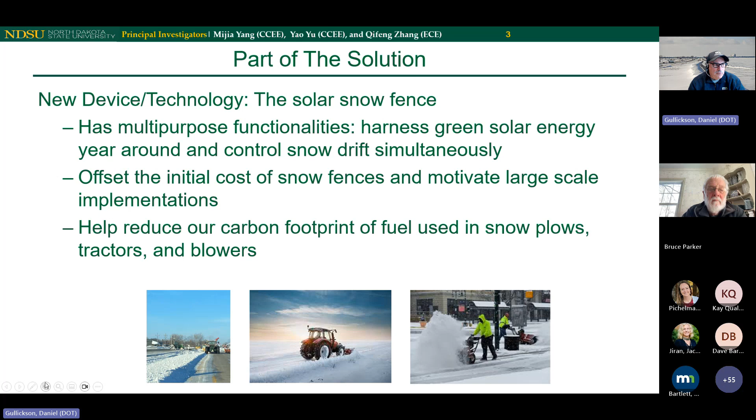Now, as we look at our solar snow fences, we want to make sure that they also function as a snow fence. So as part of the research project, the North Dakota State folks are going out there and measuring the drift profile. Here we have our solar snow fence. It has a porosity of about 38%. So it's got a little more density than our traditional snow fence, which has 50% porosity. So that does cause the snowdrift profile to be a little bit different. But at the end of the day, we want to have an understanding of that so that we can properly site these things in the field.

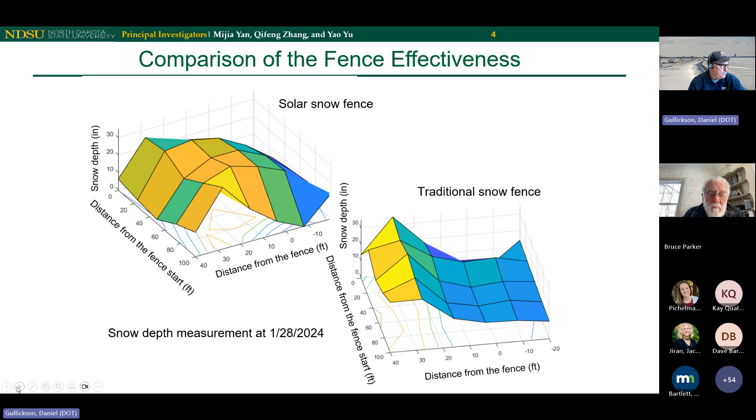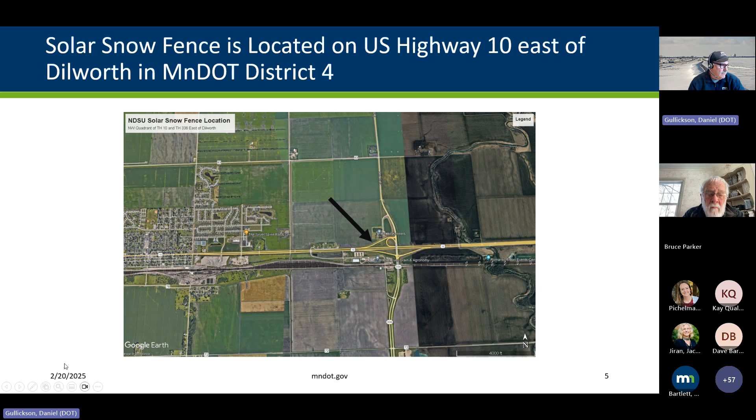To give you a feel for where the snow fence is located, it's located in MnDOT District 4 off US Highway 10. And the prevailing wind direction is shown with the black arrow there; it's coming across a mile plus across the farm fields. So we've got a really good test section here for assessing its effectiveness.

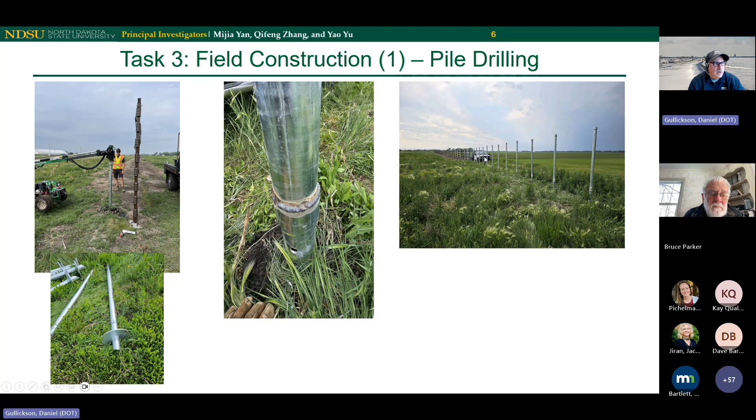The snow fence installation here is using a different type of method of installation. They're using helical foundations, which basically get screwed into the ground. And then when they hit resistance, they know they can stop, that they have enough resistance there to hold the structure. But they can keep adding these extensions here until they hit that point of resistance. So it's an innovative way of installing it. These foundations are in the ground about 6 feet, and this is the post that goes into the sleeve, and then you can see the posts that are located here before they start to assemble the solar panels.

It's an 8-foot tall system, and the solar panels have a metal backing to give them support. They were finding that they weren't going to have enough strength in the solar panel if they did not put the backing on there. And so they were able to test that in the lab at North Dakota State. And then we've had it out in the field now for 2 years to assess its effectiveness in terms of holding up to the wind loads. And it's working really, really quite well for us.

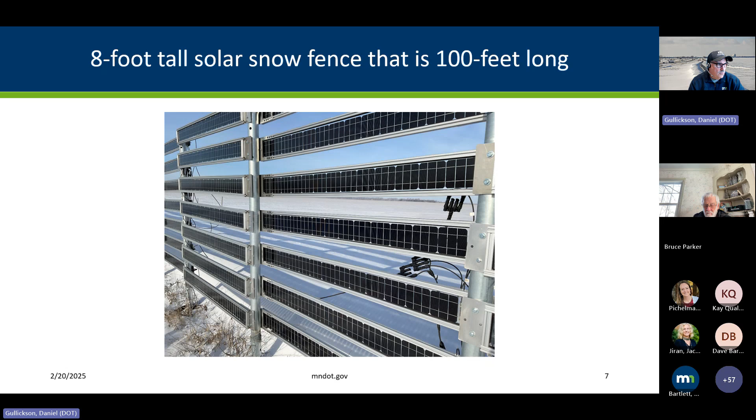So what is the energy production of this solar snow fence? We have a 100-foot section that was constructed, and they are collecting monthly and daily data in terms of its energy production. And so on average, we're producing 11 kilowatt hours per day with this 100-foot section of snow fence.

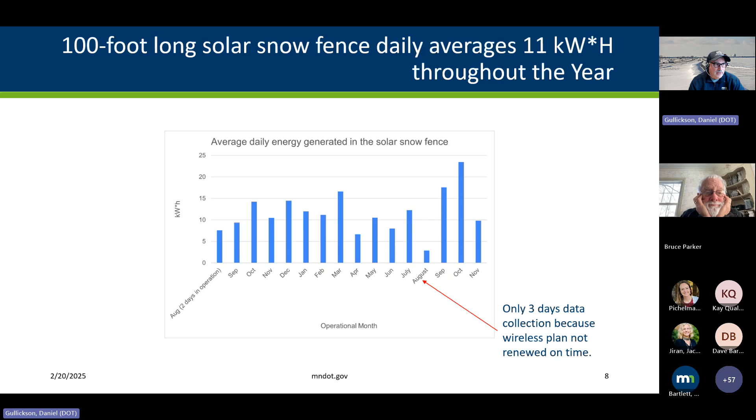As we look at our year, the colder months like November, December, January, February, we're all pretty much right above that 10 kilowatt hours per day, and that's with the lower sun angle. So that's encouraging. You'll see an outlier here. Their cell phone plan wasn't renewed on time, so we're missing data for the month of August. So that's why we see the month of August at such a low level there. But that's the beauty of research: you can have these little hiccups and it's not an end all, it's just part of the learning curve.

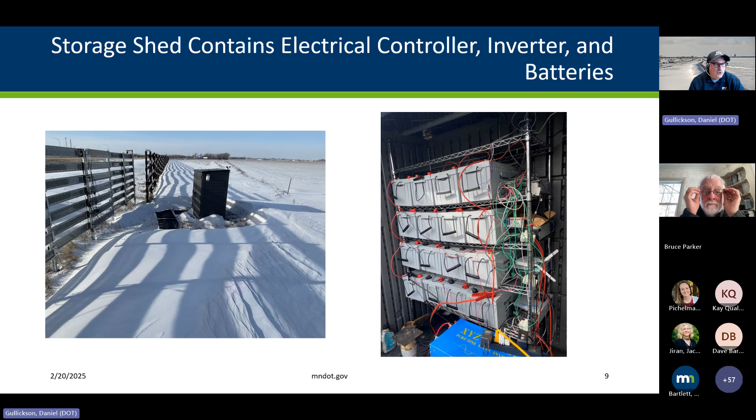So the way the system works, the system is not connected into the grid at all. Everything that's being produced by the snow fence is being used on site. The energy that's being collected is running through these cables and going to the storage cabinet. Inside the storage cabinet, we have our battery system, the inverter, and the controller for managing the system. There's also heated pads around it here. And then they have weather instrumentation, little lighting here, just having opportunities to utilize some of that energy that's being produced since we're not in the grid.

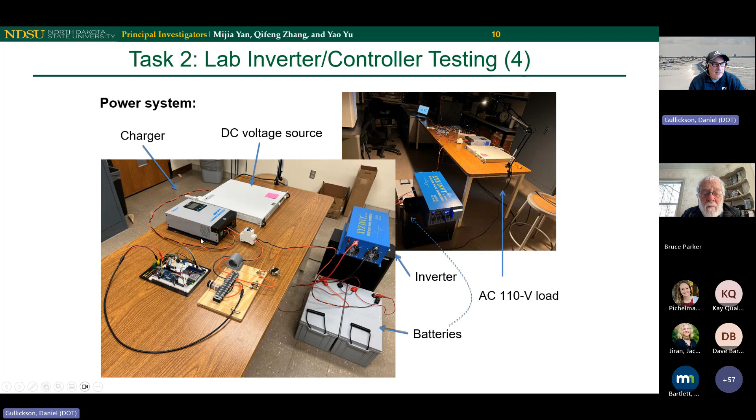So as you look at the solar snow fence, the solar panels are collecting the energy from the sun in a direct current. So then it needs to go through an inverter so it can be put into an alternating current that can be used by your appliances out there or to be connected up to the grid. So they had to come up with the electronics here to be able to convert the power. And a lot of innovation here was done by North Dakota State.

It uses a solid state transformer to read the sensor outputs from the main module to prevent unstable operation. The entire system can be disabled in the event of an emergency. Modules are isolated, so a problem with one does not affect the entire chain. And due to the high frequency isolation transformer design inside each inverter module, only low voltage DC current of 30 to 50 volts and low voltage alternating current of 36 volts are generated within each module.

This is really an important piece in order to prevent accidental electrocution. Even if the solar system is hit, someone goes up to it and hits it by accident or in the form of a crash, we don't want to see people get electrocuted. And so by managing the system here, we can make it safer and have it in areas where people could be around.

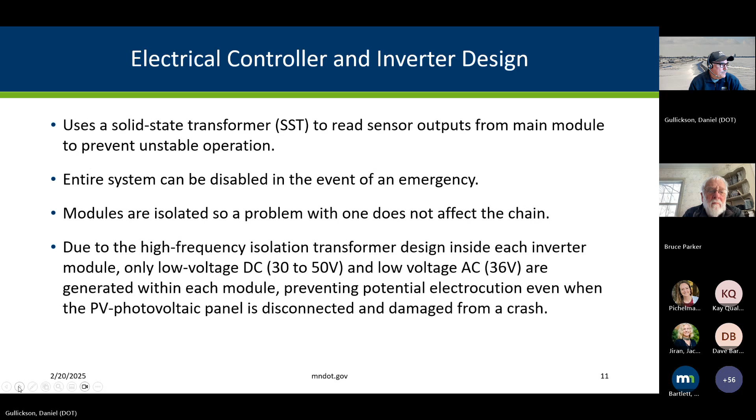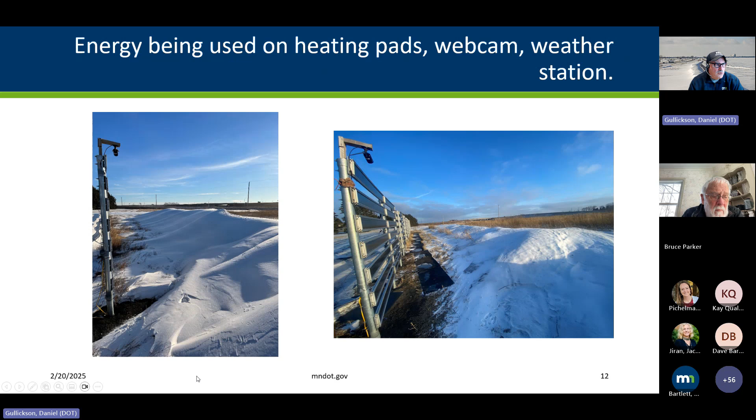So as I mentioned, the energy is being used in these heating pads. After the snowfall here, you can see the heating pads are covered, and then later in the day, the snow is melted. This is kind of an active system in the sense that it's not only just a snow fence, but it's also actively melting the snow around the snow fence throughout the winter. And that can have some benefits in reducing our offset from the road with these snow fences because they're continually melting snow. We also have a webcam out there. So we're trying to find opportunities to utilize that power on site that's being generated.

So one of the things that the research team from North Dakota State looks at is the economics of this. As part of their benefit cost analysis, they found that a power purchase agreement model is a mechanism that would allow MnDOT to accrue the benefits of the solar power without owning the system. In a power purchase agreement, a developer procures, builds, operates, and maintains the system, while MnDOT may buy the power from the developer at a negotiated rate.

And thus the developer builds the system, MnDOT would benefit from it and also be purchasing it at a negotiated rate. And there's various solar developers out there, and there's probably more that'll be coming on board. So with the power purchase agreement, the benefits to MnDOT are minimal upfront capital costs, potentially lower energy costs for our system, and no system upkeep because it's being done by others.

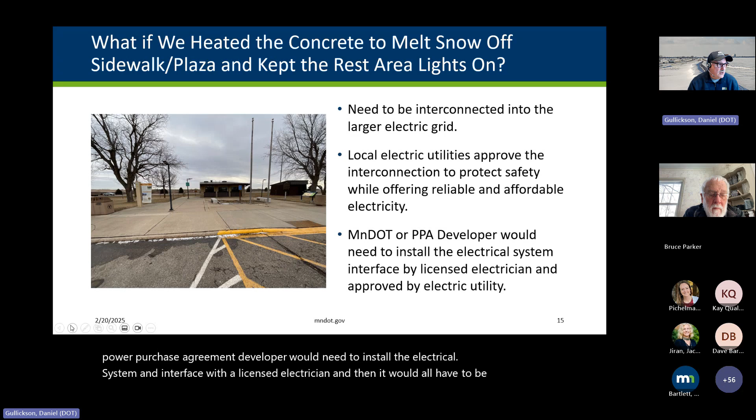So looking at that scenario there, we've got 6,000 square feet that would need to be melted in terms of sidewalk and plaza to get up to the rest area building from the parking lot. North Dakota State looked at, well, what does it take to melt 2 inches of snow? It takes about 14.4 BTUs per square foot to be able to melt that snow. And so as we look at the number of BTUs needed to melt 6,000 square feet of sidewalk and plaza, that's over 100,000 BTUs. 1 kilowatt hour is the equivalent of 3,412 BTUs.

And so you look at the number of BTUs divided by that 3,412, it converts it into, we need to be having the ability to produce 29.81 kilowatt hours per day. Now the concrete is probably only going to be 80% efficient in terms of transferring that energy, and so we need to factor that in. So with that, we need to bump that up to about 37.26 kilowatt hours per day. We know that the 100 lineal foot of snow fence is 11.7 kilowatt hours. So taking that 37.26 divided by the 11.7, we need about 318 feet of snow fence to be able to keep that sidewalk plaza melted.

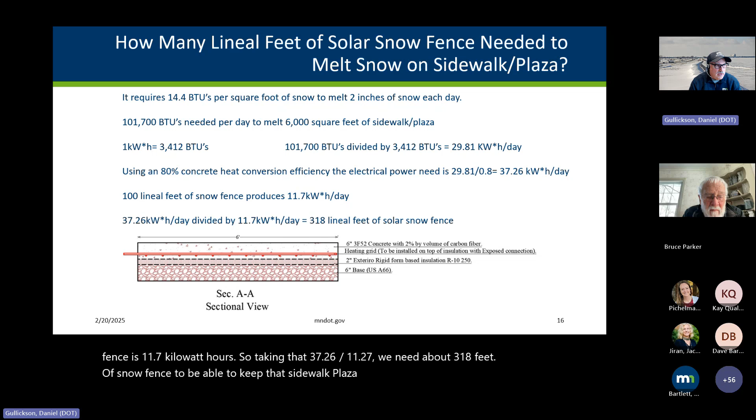And some of the other research that we're seeing, like from other universities, like Iowa State, looking at having heated pavements, having the 6-inch base, having 2 inches of styrofoam insulation, but near that base, putting in your concrete that has a carbon fiber 2% by volume content helps to move that energy from the heating grid that would be embedded into that concrete. And so this would be just a hypothetical scenario, but could have some real life applications in terms of just making it safer to get into a rest area building.

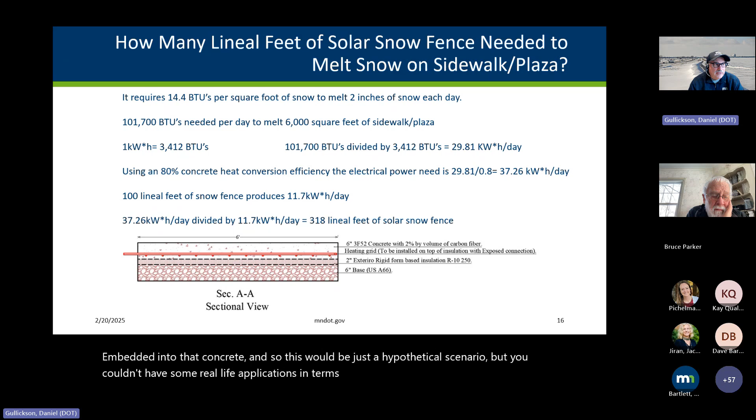What if we were to keep the lights on? Well, reaching out to the utility company, they looked at our energy use in 2023 using 33,480 kilowatt hours of energy, which figures out to be about 91 kilowatt hours per day. In 2024, the numbers are fairly similar. The peak demand was 10.2 kilowatt hours. And so looking at the ability to keep the lights on, we would need 780 feet of snow fence to be able to keep the lights on in that facility. And so if we want to keep the lights on and keep the snow melted on the sidewalk and the plaza, we would need about 1,100 feet of snow fence to be able to meet that demand at that rest area.

So summary and conclusion, the solar snow fencing system has been designed, built, and installed in the field. We haven't implemented something like I described here, like at that rest area scenario, but we have developed a 100-foot section to test to see what it can produce. And the performance has been monitored over the past 12 months. Our average energy generated averages between 10 to 30 kilowatt hours, depending upon the solar intensity of the day. Electricity generated has been used by 16 melting pads, which makes this system an active system that it's not only a snow fence, but it's also actively melting snow throughout the winter.

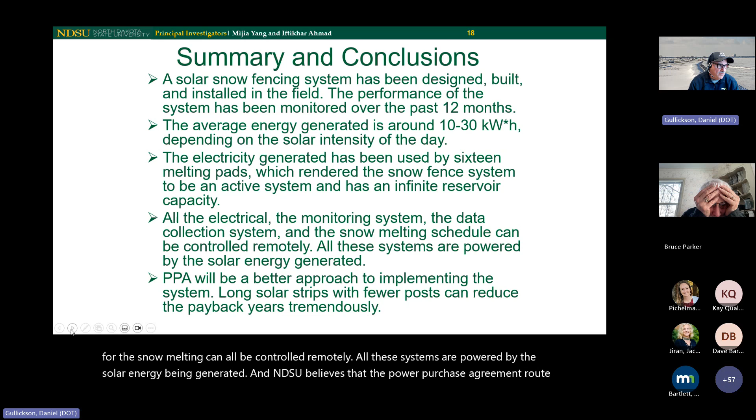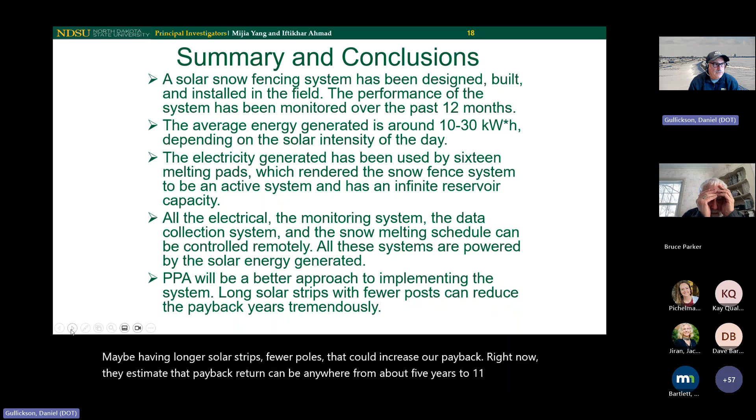And all the electrical, the monitoring system, the data for the snow melting can all be controlled remotely. All these systems are powered by the solar energy being generated. And NDSU believes that the power purchase agreement route is the best approach for implementing the system, and that there still can be some efficiencies gained in terms of maybe having longer solar strips, fewer posts that could increase our payback. Right now, they estimate that payback return can be anywhere from about 5 years to 11 years with this type of a system that they've developed, but there could be further efficiencies gained with further refinement.

I've also reached out to the Department of Administration, Office of Enterprise Sustainability, to get their thoughts on the solar snow fence. And their thoughts are that the amount of solar energy being produced by this is less than 2 to 10 megawatts, and may not garner much interest from solar developers. This 1,100 feet that I mentioned that we were doing this hypothetical, that would have produced about 0.13 megawatts.

So it may not attract much interest from these larger developers. The solar snow fence is a specialized custom build application that could scare away some developers. NDSU had to fabricate those solar panels so they're 6 inches wide, getting them to fit on the rails. That's not your typical solar panel. They're usually much larger. And so there might be some challenges associated with that.

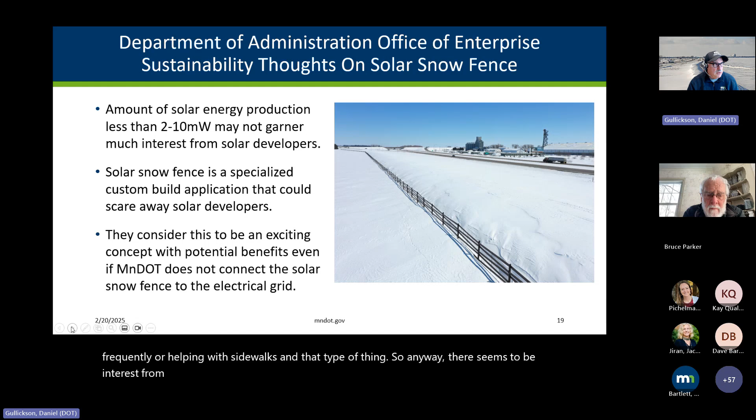But all in all, they consider this to be an exciting concept with potential benefits, even if MnDOT does not connect the solar snow fence into the grid. Like, for example, if we were to maybe just heat the concrete, heat the surface so that maybe bridge decks aren't frosted up as frequently, or helping with sidewalks and that type of thing. So anyway, there seems to be interest from the Office of Sustainability within Department of Admin in this concept. And with that, I thank you.

Thanks, Dan. Appreciate that. It's been a really fun implementation project to follow. So we really appreciate your time. Next up is Elliot McFadden. He's going to share about impacts of shared mobility on infrastructure usage, greenhouse gas emissions, and accessibility.

Yes, thank you for having me. Let me make sure I'm on the right window. So I'm going to be presenting as the technical lead on our project, impacts of shared mobility on infrastructure usage, greenhouse gas emissions, and accessibility. It's a very pithy name that just rolls off the tongue.

I wanted to start just by defining what is shared mobility. I have previously been the manager of our statewide shared mobility program at MnDOT, but it's maybe a technical term not everyone's familiar with. So when we talk about shared mobility, it's essentially any transportation service that is shared among users. So users may use the service at the same time or independently of one another.

So examples of services that are used at the same time are public transit, taxi and ride hail services, and carpooling and van pooling. And services that may be used independently are things like car share, which is akin to short-term car rental within neighborhoods, bike sharing, scooter sharing, and some types of delivery service.

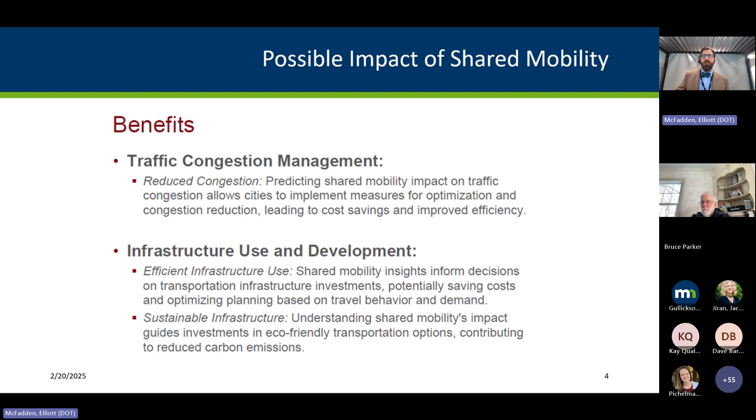And bike sharing programs help get people onto green transportation, but also have operational needs to balance vehicles, move them around, that may offset the benefits as well. So some of the benefits we think about with shared mobility, as I mentioned, traffic congestion. So if we're moving people out of private vehicles, we may be looking at ways to reduce traffic congestion. It also can reduce impacts on infrastructure development, especially if you move to bikes and transit. There may be less need for additional road capacity and less wear and tear.

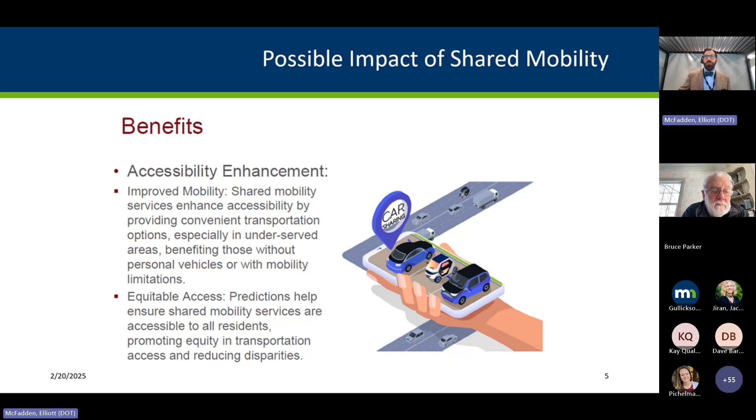It's also an accessibility issue. So we have many people within our communities that don't have access to private vehicles, and shared mobility is another layer on top of public transit. Private shared mobility providers can add more access, more options for folks to be able to go to appointments, be able to go to work, and just generally quality of life. Be able to access everything that someone with a personal car can.

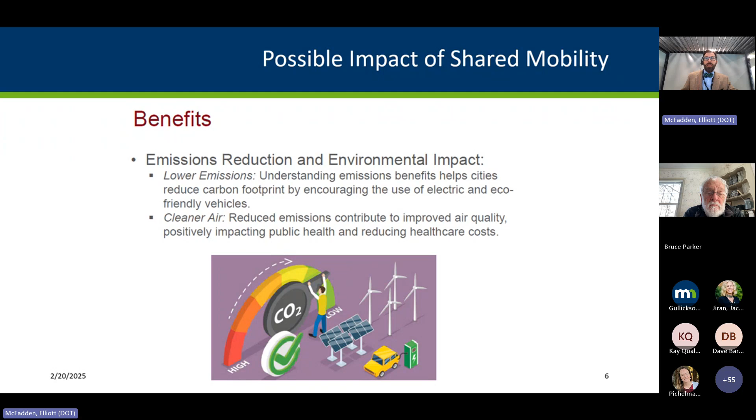It also has tremendous potential to help us meet our greenhouse gas emission goals. So moving people to lower carbon footprint options. Also, because of the heavy use of fleet cars, it makes it easier to introduce electric vehicles into fleets at a higher rate than you would see in the private marketplace. There are some costs though as well. So we may need to look at how we design infrastructure to accommodate things like pickup and drop off zones and spaces for bike share, bikes and scooters, things like dedicated lanes, additional sidewalks, and additional accessibility.

So the project that we've been working on has been trying to address the problem of how shared mobility options are changing travel behaviors. How are they impacting vehicle miles traveled, infrastructure use, and the environment? And the challenge that we have is our existing models don't really account for these new shared mobility options. So we have a harder time predicting the impact as these systems grow, or policies that may be implemented to grow or reduce the number of options.

And so the solution is to create a new model that looks at how different fleet sizes and different policies may impact these different goals for both MnDOT and also for local partners. And our lead investigator on this is Michael Levin, a PhD at the University of Minnesota, who works in the Department of Civil, Environmental, and Geo-Engineering.

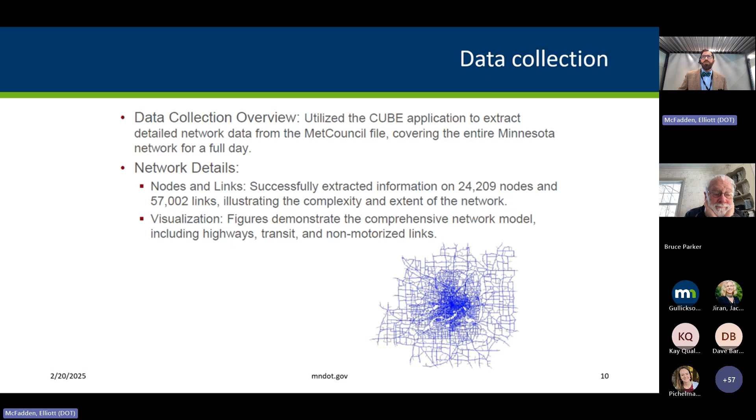So just an example of some of the data collection that's already been happening, using our different sources of traffic information to pull together a really comprehensive look at traffic patterns within our road network. Also looking at accessing transit data and layering that on top of it, as well as data from shared mobility providers, so that we're really getting a comprehensive look at the kinds of trips and vehicles that are being used and where they're being used across the infrastructure to help build a realistic model.

The modeling approach itself, as I mentioned, brings together all of these different data sources. It's looking at how people choose to make a trip, by what mode. It assumes that users are going to try to take the travel option that provides the least amount of travel time as its primary way of looking at mode choice. And it aims to be a comprehensive model of predicting travel behavior based on different levels of fleet availability and policies that you may implement that may impact those as well.

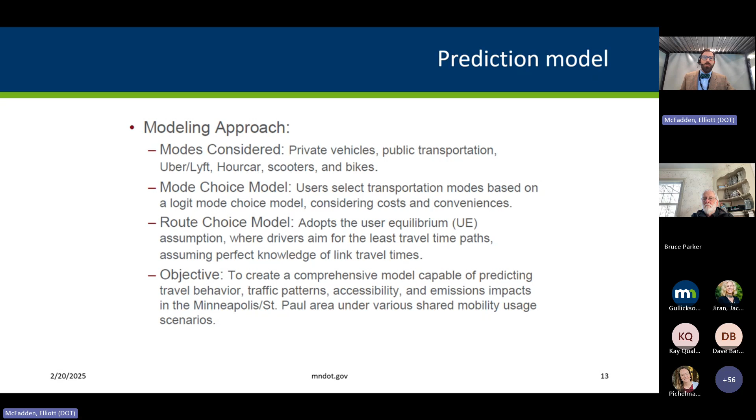I'm going to share a sample scenario that's been run as part of the model as it's being developed right now. So in this case, we're looking at the city of Minneapolis, and we have 4 scenarios. We have a base scenario, which is the current conditions in Minneapolis. We have a scenario where we've implemented policies that affect the price of using a TNC, which is a transportation network company or ride-hail service, so a service like Uber or Lyft. We've implemented a policy that makes that very high cost, so it's discouraging users from using the TNCs.

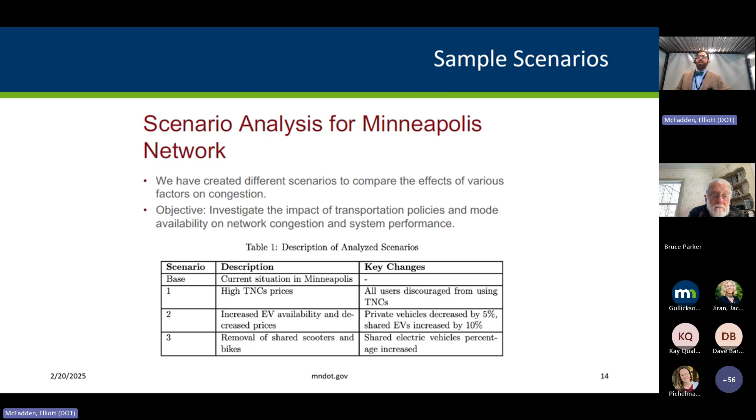The second scenario is we're looking at increasing the availability of shared electric vehicles. So if you're familiar with Hourcar and the EV program, this would be what that would be. Looking at some of the impacts of that in the decrease of private vehicle use and the increase in shared electric vehicle use. And then the final is policy: what if you removed permitting for shared scooters and bikes, and what impact that would have. So I'm just showing a couple of, on the initial modeling, the impact across this base scenario and 3 alternative scenarios.

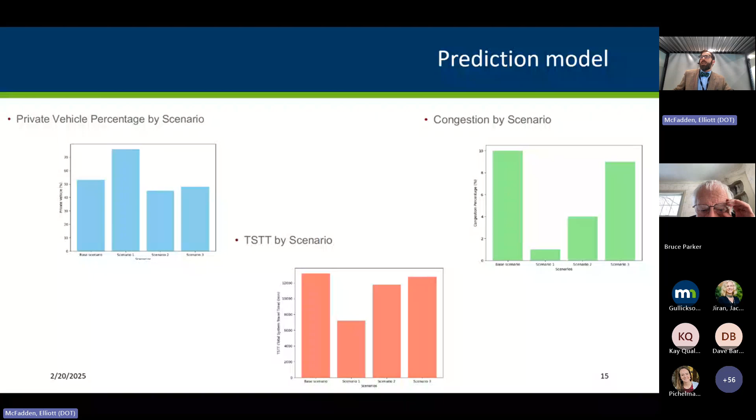And our project end goals are really to make this a tool that better informs decision makers. So both at the state level and more specifically, a lot of policy around shared mobility is developed at the local level. Having a data-driven approach to understand what the impact of different policies would be as you increase or decrease the availability of these services, and then have a better sense of how that fits into the general landscape of overall policy goals for those organizations.

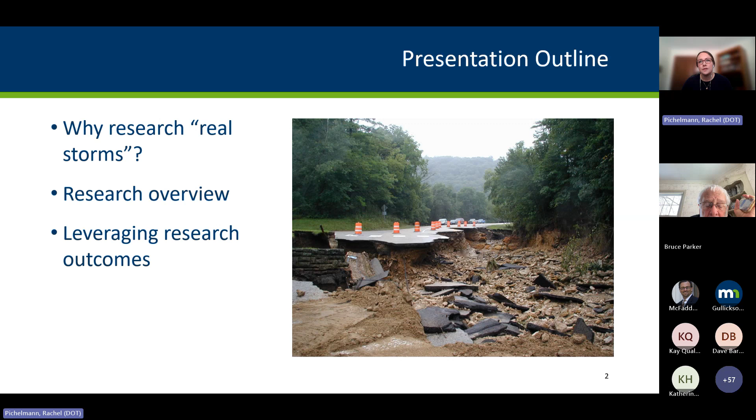So, quick overview of the information I'm going to share. I'll start out by talking about why we are researching real storms and what exactly I mean when I say real storms. And then I'll give an overview of the research itself. And I'll conclude by talking to you about how we plan to leverage the research outcomes. So, to get started, why are we researching real storms? And there's kind of two parts to this answer.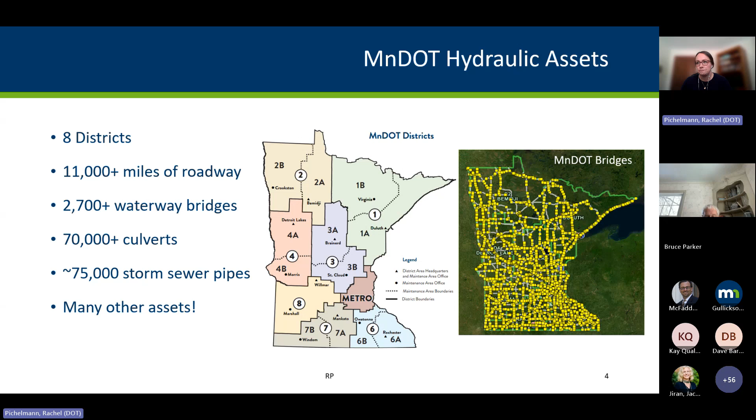So I'm actually going to back up to the previous decade and highlight for you one event that happened in August 2007. So the graph shown here is illustrating how much rain fell during this event. And just call your attention to the blue areas. That's when we get into the 6 inches plus. So it's about a 100-year rainfall event. And in that far southeastern corner of the state, there was actually a record set during this event. And that record still stands for the most precipitation in 24 hours at a National Weather Service observing station. And it was more than 15 inches of rain that fell in 24 hours from this event.

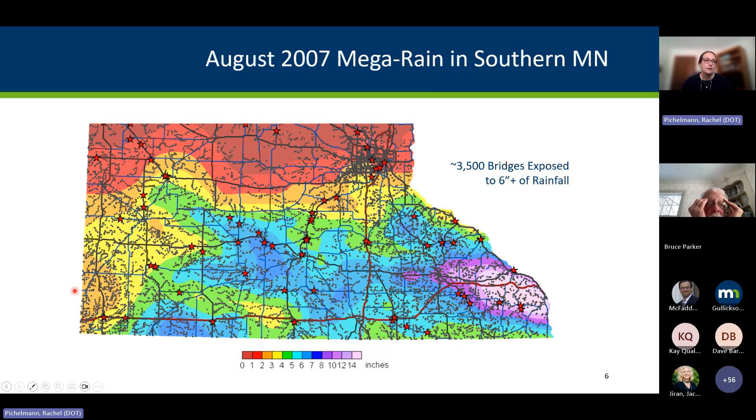It's not surprising then that we had some damage, right? So the photo on the left is from the Money Creek Bridge on Highway 76. During this event, the water in Money Creek really swelled and it ended up washing away the bridge entirely. So of course we've got maintenance forces out there closing the road to keep the travelers safe. And that closure had to continue until that bridge could be replaced.

And then on the right, we see Highway 74 through Whitewater State Park. And again, there's so much water in the river because of that rainfall event that it led to erosion along the roadway embankment and caused the damage that we see here. So once again, we've got to close the road, keep the public safe, and get the repair completed.

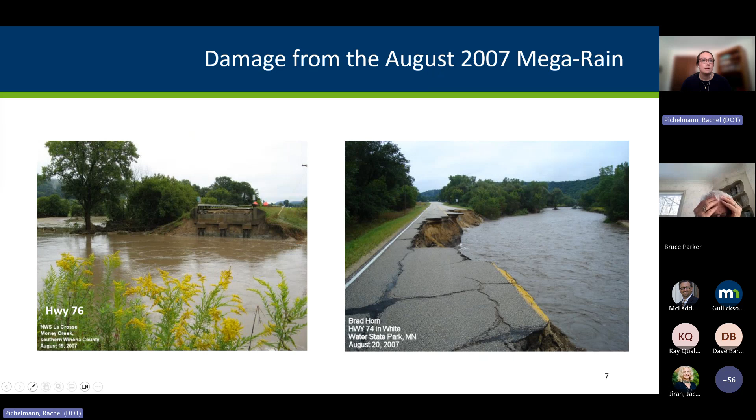And following that event, District 6 put together a really nice map that illustrates really how widespread the highway closures were, and so we've got the purple lines showing the state highway closures. But what you have to keep in mind is that there's also local roads that sustained damage from that event and were closed as well. So we're talking about really significant impacts to transportation following this flood event.

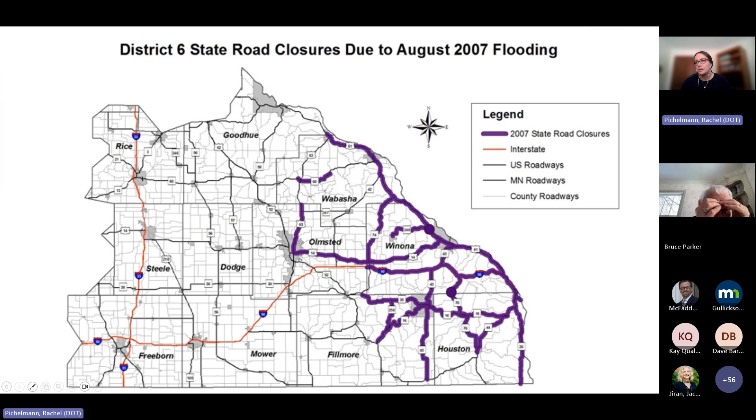Now, that was almost 20 years ago, but we got a reminder just last summer of how impactful flooding events can be. So this is a screenshot from our 511 map taken last summer. This is around the same time we started to learn about the Rapidan Dam getting overtopped. But here we see that there were more than 20 flood-related closures and warnings just in southern Minnesota.

And because of the scale of the map here, you can't even see northeastern Minnesota. But at the same time that we were experiencing these impacts, there were areas in northeastern Minnesota and the Arrowhead region that were also experiencing flooding.

And this is a map that shows the rainfall totals from that event. So in that northeastern corner of the state, we're seeing 5 to 6 inches of rain. Again, that's like a 100-year rainfall event. That's what we would typically size ponds and some bridges to handle. But in southern Minnesota, we got more than 9 inches of rain. And this is over a 9-day period. But that's still on the order of a 500-year event, so far exceeding what we would typically be using in design. All right.

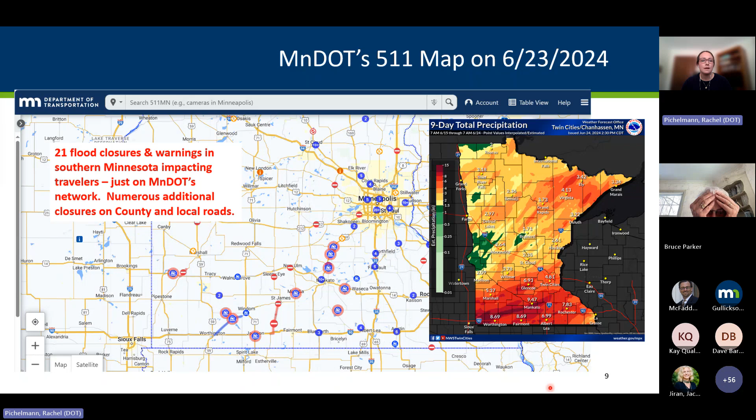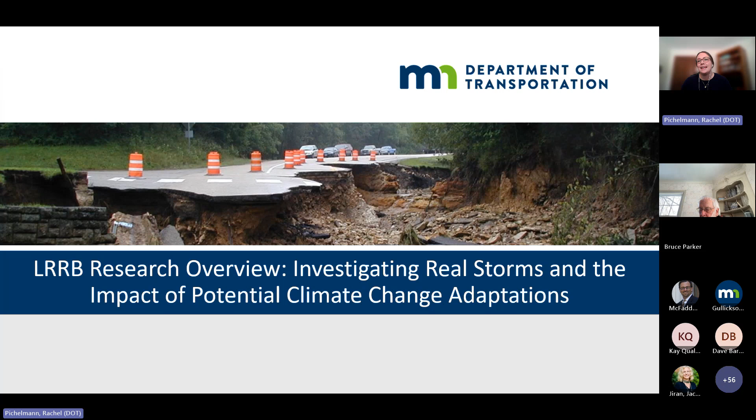So transitioning now, hopefully you have a good understanding of how flooding can affect transportation. So I'm going to talk a bit now about the research project that is underway, the title being Investigating Real Storms and the Impact of Potential Climate Change Adaptations. So one of the tools that our research team at the University of Minnesota is using is a hydrologic and hydraulic model, and I'm going to say H&H model for short. And an H&H model is something that we use every day in water resources to design our water infrastructure, right? Our culverts, bridges, storm sewers, etc.

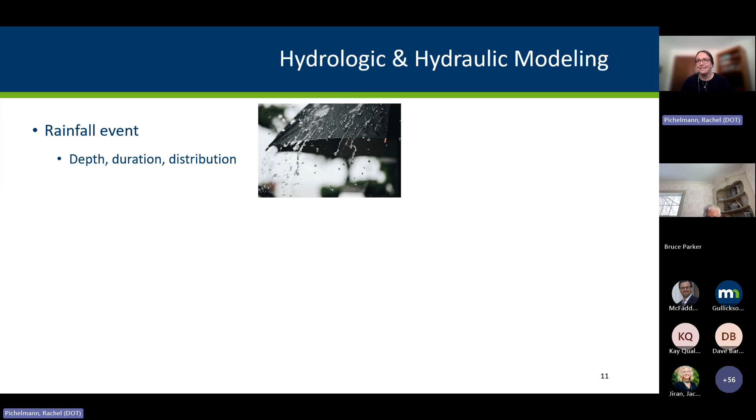And in order to create an H&H model, we have to first define the rainfall event. So we need to tell the model how much rain fell over what duration and what the rainfall distribution looked like. So was it sprinkling or pouring throughout the duration of the event? We also need to tell the model what the watershed looks like. So how large is it? What does the land cover look like? Are there impervious surfaces like buildings and pavement? Are there pervious areas like lawns and forests and wetlands? And what are the soil types like? We also define the antecedent conditions. What is the soil moisture like prior to the rainfall event that we're simulating?

And what we get out of the hydrologic component is really an understanding of how the watershed responds to the rainfall event. How much water from the rainfall event gets absorbed by the soil and how much runs off downstream. And then the hydraulic component of the model helps us understand what that runoff does downstream. We can define ponds, rain gardens, pipes, ditches, streams, other features that are intended to hold or convey the stormwater runoff. And ultimately what we get out of our H&H models is an understanding of flood depths and peak flows.

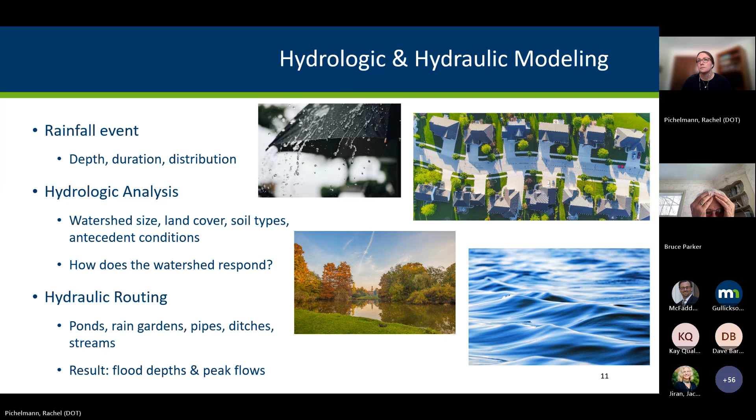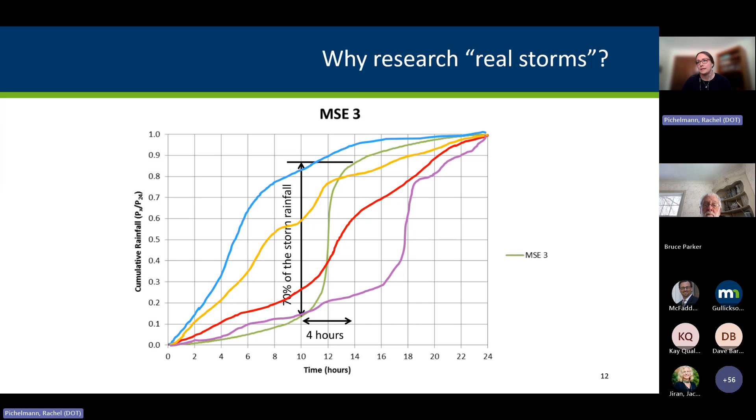And what's important to think about here is that when we get these breaks between the really intense periods, it gives the watershed a chance to recover, right? So it gives the soil a chance to sort of drain a bit and have some capacity to absorb more runoff. And then it also gives our ponds a chance to drain out some stormwater to recover some of their storage capacity. So this is a real rainfall distribution with those periods of relief in between the really intense times. It's different than what we typically assume in design.

When I joined MnDOT 2 years ago, there was already related research underway, and they were really looking at what can we do to reduce our flood risk. And so they were evaluating strategies like adding more stormwater management features to help slow down the water. And they were really focusing on how do these features help us reduce flood depth and peak flow. I encourage you guys to check out that research, but I am going to kind of spoil it here and let you know that a lot of these strategies had really minimal benefit.

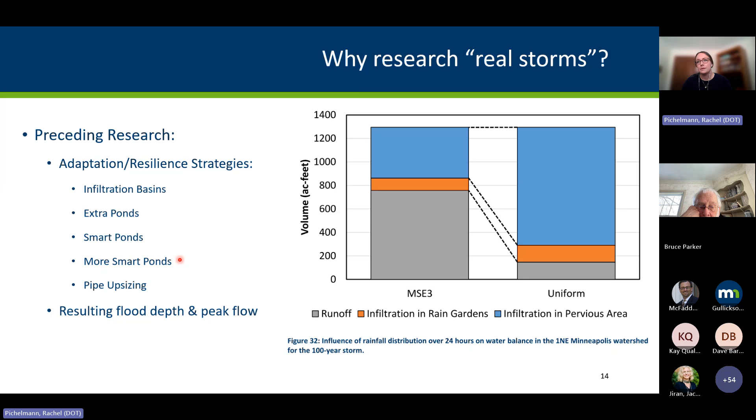So this again is just a uniform rain, also probably not realistic, but it gave some insights into the effect that our assumed distribution might have on the results that they were seeing in that research.

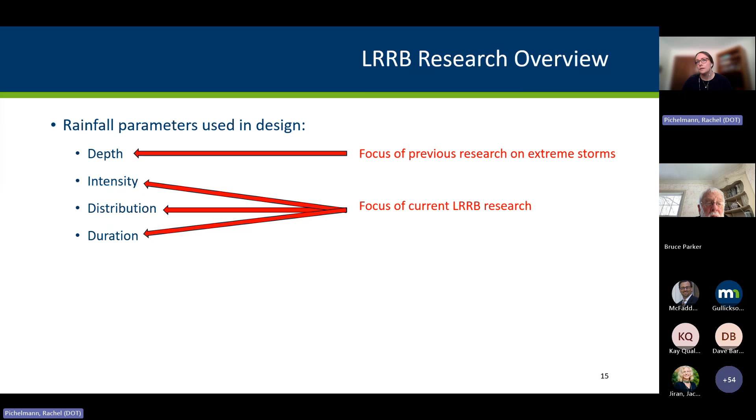So as I mentioned, when we're building these H&H models, there's rainfall parameters that we have to set. And in the preceding research, they did test changes in rainfall depth corresponding to climate change. But with the current research, they're actually going to take a closer look at these other parameters. They're going to review historical data to see what trends there might be in rainfall intensity and distribution and duration. Then, with those insights, they can reassess our infiltration capacity for pervious areas and green infrastructure like rain gardens. So perhaps we can count on pervious areas and green infrastructure to help us reduce flood risk.

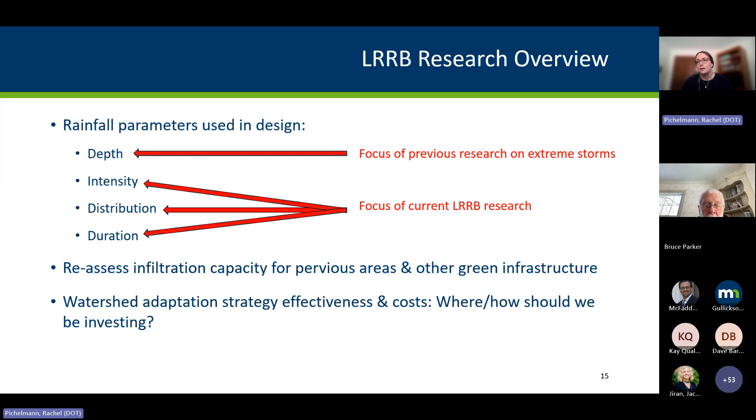And then they're also going to look at those watershed adaptation strategies again to help us determine the best place to be investing to help reduce flood risk. So the outcomes of the current research will be a better understanding of the trends in rainfall intensity, duration, and distribution. And the research team is working on that task right now.

Then they'll also be using their H&H models to really test those traditional rainfall assumptions, those that we've always used in our designs, versus the lessons they've learned by looking at trends, so versus real storms. And how does the difference in our assumptions affect the timing of rainfall and runoff and ultimately downstream flood risk? And then finally, they'll be looking at flood risk management strategies so that we can get a better understanding of, again, where is the most cost-effective way for us to spend money to help reduce flood risk?

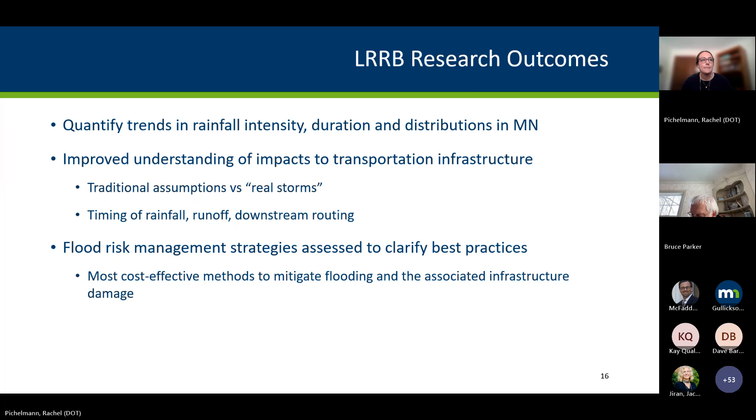So how do we plan to leverage the outcomes? We are in the process of developing new design guidance. It's really focused on making our water resources designs even more resilient to flooding. And so it presents an opportunity for us to then incorporate some of the findings of this research.

We also recently introduced something called a check storm. So even though we typically would design for a 10-year or 100-year event, what we're encouraging designers to do is consider a what-if scenario. What if you experience an event that exceeds what you usually design for? What are you seeing for flood damage potential? And do you need to make some adjustments to your design to account for that?

And so if there are takeaways from the research team about rainfall distributions and intensity and duration, we can also include that in this design guidance. Ultimately, again, we want to make sure that we are prioritizing the best, most effective adaptation strategies. And that is probably the most important takeaway from this research.

We know that we're going to have to keep investing to make our infrastructure more resilient to flooding. So we want to get a better understanding of the cost effectiveness of flood resilience strategies based on real rainfall characteristics so that we can make wise investments in flood risk reduction. And that concludes my presentation.